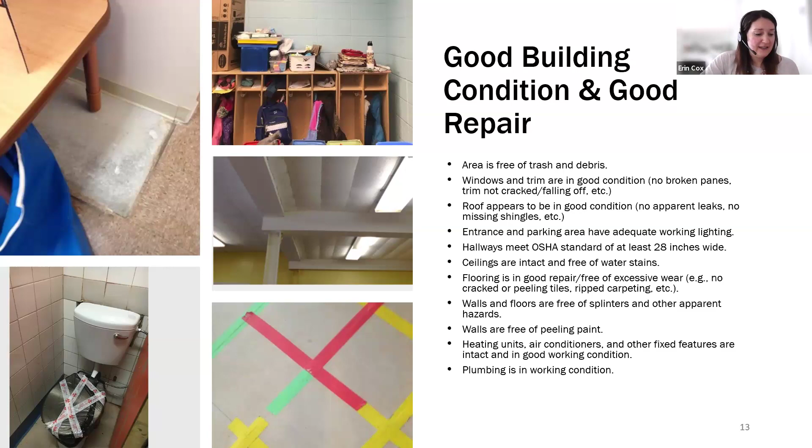In addition to building condition and good repair, regulations generally reference facility health and safety. Common things referenced are that there aren't any sharp objects or major tripping areas, or obvious child hazards that can impact a kid's ability to move freely through a space, that emergency exits and pathways are clearly identified, spaces are uncluttered and easily supervised, heating units are concealed and securely covered, and operable windows have secure screens. This can be a lot to manage between making sure the facility is in good condition and meets health and safety requirements.

But maintenance planning is really, really important. So with that, we'll talk more about maintenance planning and how you can prevent issues or make sure you're meeting some of these requirements. So I'll kick it back to you, Megan.

Maintenance planning, we are definitely all about planning. So just getting on the same page as others at your program, or if you lease a space, your landlord, if you're sharing a space, you might have other tenants you want to coordinate with. This type of plan can help create buy-in and clarify to everyone involved how to communicate when maintenance needs arise, and when they do, what action to take to make sure they don't snowball into greater issues.

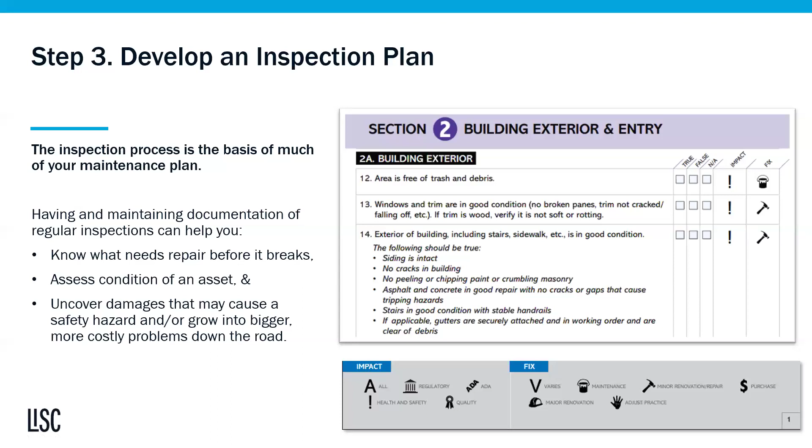If you are selecting false for any of these, this particular checklist also provides some guidance, as you can see in the icons at the bottom here. With these in the impact column, you'll see those are all health and safety related. The first item is a maintenance item, so you'll be able to pick up that trash and debris. Then the other items are minor renovation and repair that you want to take care of before they become anything major.

You may need to offer some training if you have staff who will be helping you implement the plan. Just make sure that everyone is clear on what their roles are and what to do should a maintenance issue be found.

If you're currently in a leased space, again, be sure to understand what your role is in maintaining the space, and make sure your landlord understands there are some additional maintenance needs for a childcare operation that might differ from other tenants. You want to make sure they're aware that you need to meet some of those health and safety requirements of licensing that connect back to having your space in good condition and good repair.

And lastly is budgeting. Use this plan to save and set aside funding in your annual budget for required upkeep and repairs. This should include your playgrounds, any above standard cleaning services, landscaping, regular cleaning, HVAC system servicing, all of those ongoing costs.

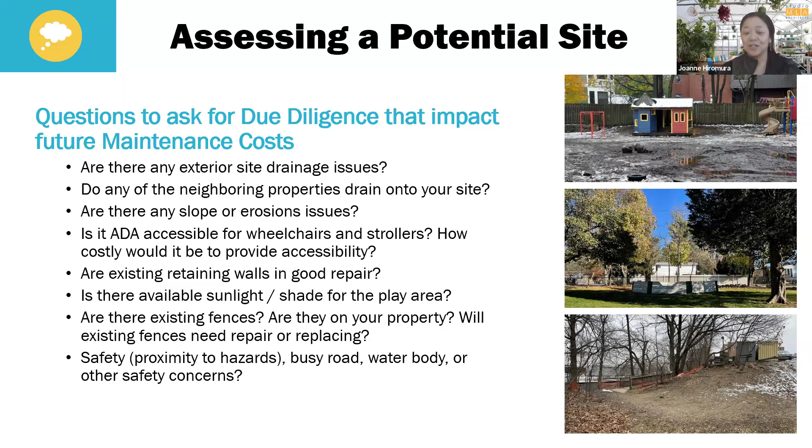Okay, next — picking colors for your walls and flooring, and dreaming and imagining the perfect layout for classrooms, corridors, staff spaces, and entry. There's so much fun you can have making your dream into a reality, or taking your reality and making it into a dream, depending on how you look at it.

But things like designing a vestibule or mudroom might seem like a waste of space in a tight center. However, having that vestibule helps with your HVAC efficiency over the life of the center. And if you put in a durable walk-off mat in that vestibule or mudroom, it helps keep the snow, rain, dirt, and sand from tracking into the rest of the center, which can extend the life and cleanliness of the floors.

Width of hallways — strollers, buggies, kinder vans, food carts, meandering children — all of these are going to be meeting in your corridors. Usually the adult pushing the stroller or cart will make way for the children in a tight corridor, and as soon as they do, that often results in wall damage. So when planning your center, make sure corridors are wide enough for at least two strollers to pass each other — it saves on wall damage in the long run.

Next, when we design for durability, there's some things to think about to increase the timeline of materials and decrease our maintenance expenditures. One thing to think about is countertops and cabinetry.

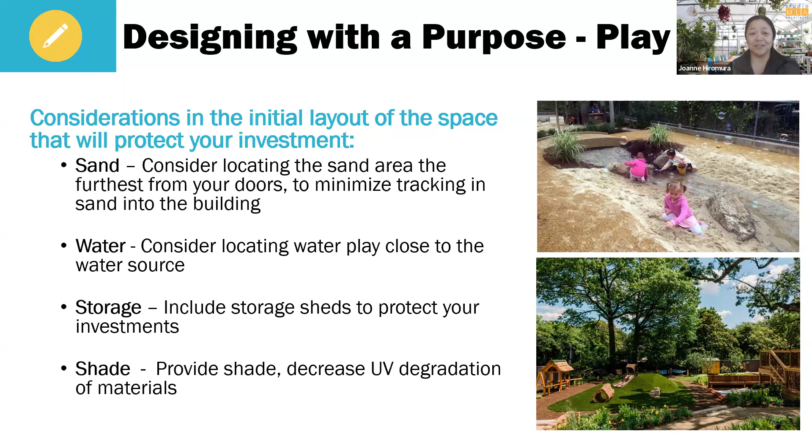When thinking about the design of your play space and what you're going to have in it, you really need to assess your maintenance capabilities realistically. Having gardening space is a wonderful activity, but you need to consider whether you have staff willing to maintain it, water the garden, weed the garden. Otherwise it will just be a maintenance headache.

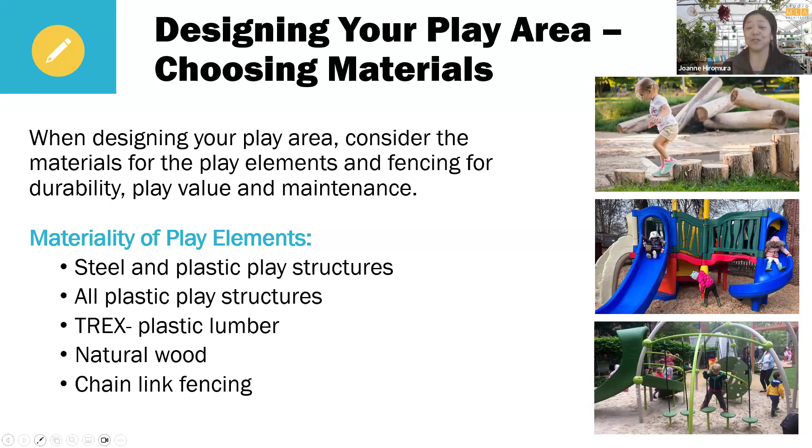Next, we're going to talk about choosing materials for your surfacing. When you're thinking about surfacing and you have play equipment that has a fall height, you'll need to install playground safety surfacing within the use zone of the piece of play equipment, and the manufacturer will let you know where that use zone is. Very, very generally, it's about 6 feet out from the outer perimeter of any play climber.

There are different types of safety surfacing. One option is called unitary playground safety surfacing - unitary meaning it's bound together, not loose. Some types of this unitary surfacing include poured-in-place rubber safety surfacing, which comes in many colors; bonded rubber mulch material, made out of shredded rubber bound together with an adhesive; artificial turf, which is like a carpet that's rolled out; and a newer product called Corkeen, made out of natural cork, also bound together with an adhesive.

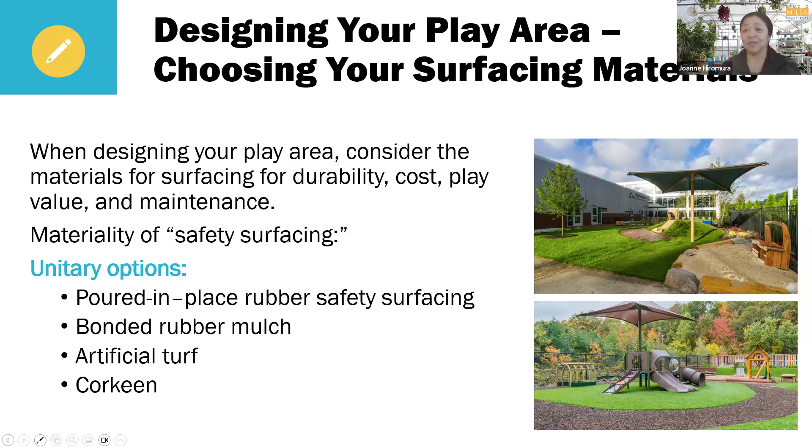These options are a lot less expensive than the unitary surfaces that we saw, but they do require replenishment and periodic maintenance. Because they're loose, they're going to be kicked around—that happens at the bottom of the slide or the base of the swings. They get displaced, and they will migrate out of the area you're trying to contain them in. And because the wood specifically is a natural product, it degrades, and you will most likely have to replenish it, if not fully replace it, at least every year.

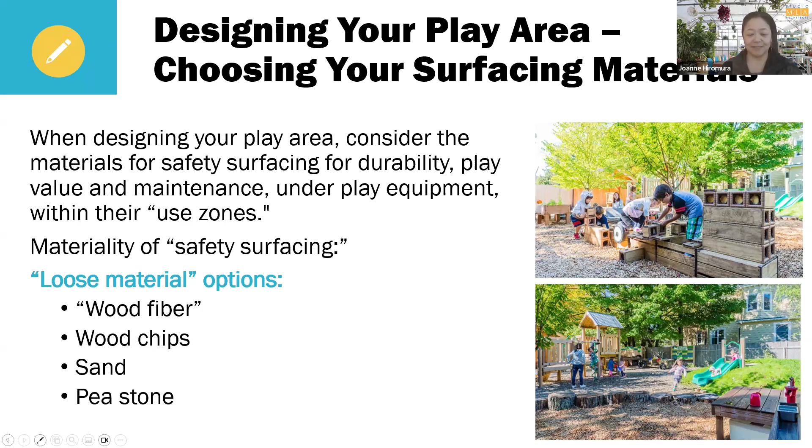But you can mix them as well. So you could have an area with wood fiber and/or wood chips or sand, and provide an accessible path to your play equipment made out of something like rubber, which is accessible.

Okay, so then in areas that aren't required to have playground safety surfacing, you'll have other choices in surfacing or pavement materials. Other surfacing could be natural lawn, stabilized stone dust, concrete, or asphalt for paths or play courts.

Natural lawn is probably your least expensive, but your highest maintenance option. Lawn is very, very high maintenance. In order to keep a nice natural lawn, you probably know just from your home experience, you need to water it, weed it, cut it, mow it, and you can't have a lot of heavy usage on it, especially in the play area.

So there is a type of plant material called no-mow lawn, which looks more like sort of natural grasses. It doesn't need to be cut—it just sort of keeps growing, and it's very tufty. You can look into that. It doesn't need the mowing, but it still would require watering.

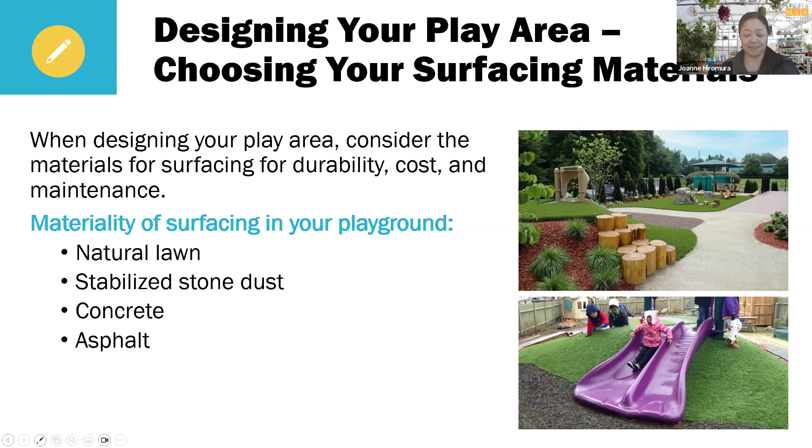Maintenance, it's a given. You absolutely must plan for it, and you've got a budget for it. It's ideal to have a short-term maintenance plan and preventative maintenance plans in place, with daily and weekly cleaning specifications. There should also be annual maintenance plans—checking and testing all smoke detectors monthly or seasonally, replacing fire extinguishers and checking their expiration dates. I'm not going to go through the whole list, but these are some of the things you want to check on an annual basis.

There should also be long-term maintenance plans. These are things on a 2 to 3 to 5 to 20 year replacement cycle, but you need to be setting aside a little bit of money each year, knowing that in 5 to 10 to 15 years these things are going to need to be done.

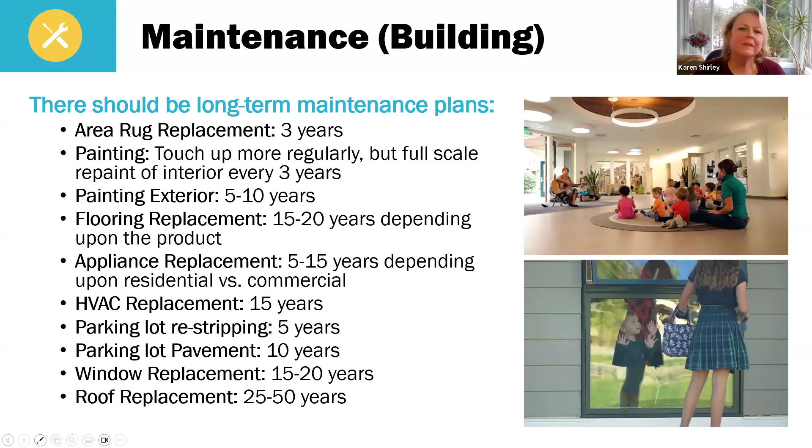There's always going to be surprises—overflowing toilets, heat units going out, storm damage, things you just have no control over. But having a plan in place and a team to support you is crucial to success.

Before you need a local plumber, get some recommendations from your neighborhood, friends, and relatives about quality local plumbers. Maybe even consider inviting one of those plumbers into your preschool room to talk about what they do and what they like about their job. Then have the children send cute little thank you notes with pictures showing that plumber respect and appreciation for their work as a community helper. Developing that relationship in advance means that when an inevitable plumbing problem happens, that plumber is probably going to be more willing to drop everything and come help take care of you, your center, and those children.

Have professionals show you your water turnoffs. Sometimes there are local water turnoffs in your toilet rooms, but there's also, if there's a massive problem, a turnoff somewhere else in your basement or elsewhere in the building. Knowing where those are can be crucial in an emergency.

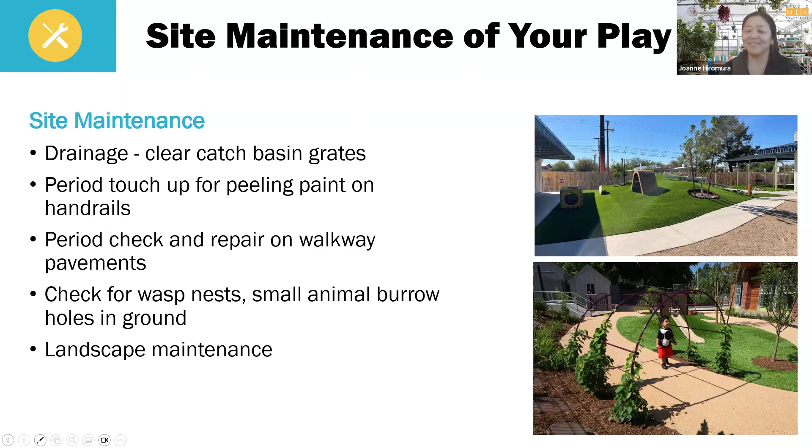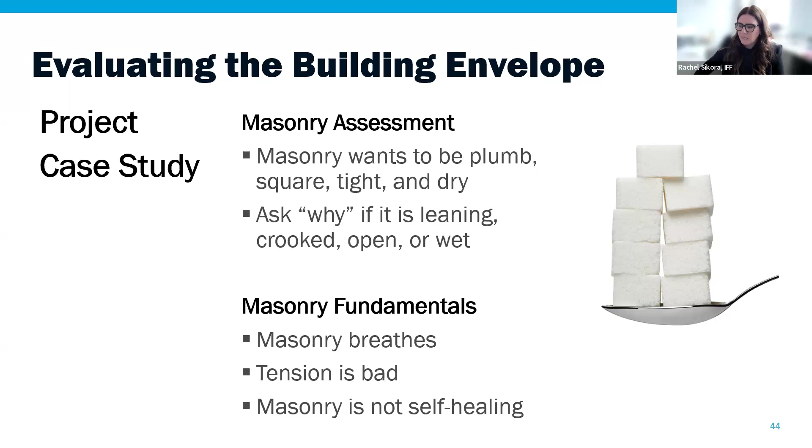Instead, we need to set the conditions that keep masonry square, tight, and dry, and then keep our eyes open when those considerations are no longer the case. The biggest challenge with water is that its impact on masonry — and roofs too, because we're going to look at roofs — is usually worse than what you can see. By the time you see the damage, there is water in that location, and that water is likely seeping elsewhere as well. Megan, if you can go to the next slide.

We'll pick up a little bit of time here, maybe go a little faster. First and foremost, setting the conditions for keeping water away from your masonry starts with the structures that are designed just to do that, and you will see variations of these same structures whether you have a home or a commercial center. These are your parapets, your gutters, your downspouts, your roof drains, and these structures must be present and intact in order to direct water off of your roof and away from your building.

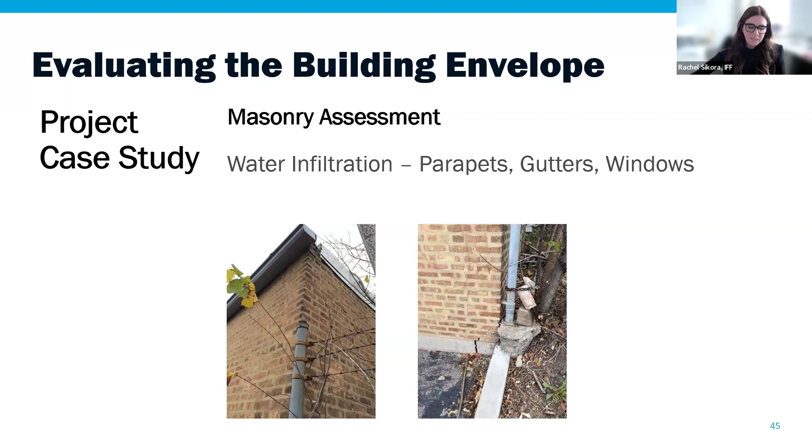Another consideration that isn't pictured here is the condition of the ground at your foundations, at the base of your walls, to continue directing water away from your building — pitching the ground away from your walls where water could otherwise collect and cause damage to the exterior walls or the interior space. Next slide, please.

The structures that direct water away from your building are so important because often you don't know that water infiltration is causing damage to your building envelope until you start to see the evidence of it, which could be a long time in the making before that evidence is visible.

As a result of water getting behind your masonry walls, you'll start to see conditions like cracking and spalling of the masonry. These are safety hazards. When units detach from the walls, they can create environmental hazards as water gets behind the walls, creating mold development, and can also cause water infiltration from the exterior wall to your interiors.

Most of us have experienced what it means to have water inside your home or your center, and the chaos and havoc that creates, damaging finishes, furniture, and costing time where you can't use your classrooms because they need to be repaired.

Other features of your envelope that keep water from entering your interior, not pictured here, include your windowsills, intact windowsills, flashing around your window openings, metal that prevents water from getting into the opening between your window unit and the wall above or around it, and the seals around these openings.

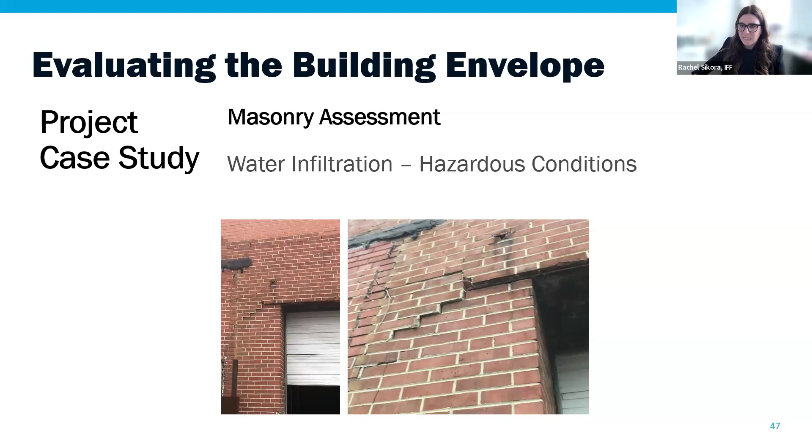This photo is an example of a steel lintel, looking a little closer at one that has become excessively rusty due to exposure to water that has not been directed appropriately from the building, but has come down the walls instead. This is an important condition to look out for because a lintel carries the load of a masonry wall over an opening, and a rusty lintel is a compromised lintel, which also indicates a compromised structure.

As we think about these conditions and the impact of water and the implications for your building, we think back to those structures and interventions, the preventative maintenance of which can help you get ahead of any impacts of water before it causes significant damage.

Water always finds its lowest point. That's the thing about water, it will always find its lowest point and damage anything below it. So starting at the roof helps mitigate any damage to the walls below, and mitigates the replacement and reconstruction of any areas that could be impacted.

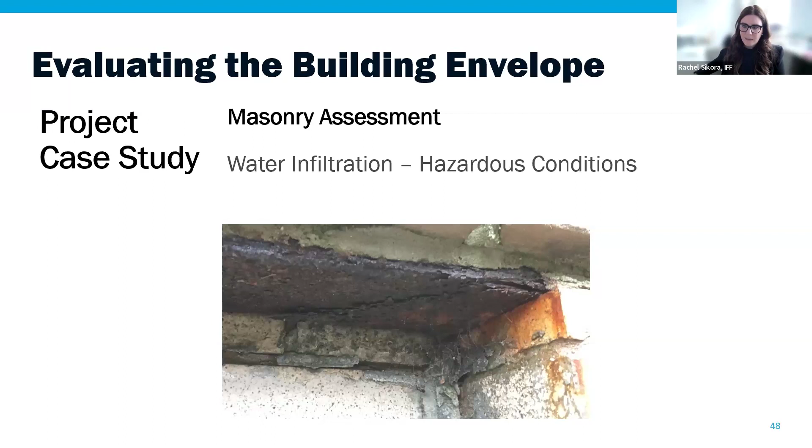Your roof is one of the most important factors in keeping your building warm, safe, and dry. As someone who routinely has to get on roofs and is terrified every time I step on a ladder, I understand roofs are somewhere most of us don't like to go. But some of the most likely opportunities for water infiltration into your building are on roofs, expressed in membrane penetrations, ponding of water, discoloration or texture in your membrane showing signs of previous ponding even if water isn't there currently, and missing flashings or wraps on the curbs for your mechanical equipment or parapet walls. Fortunately, with regular inspection and vigilance, these conditions and any resulting damage can be mitigated.

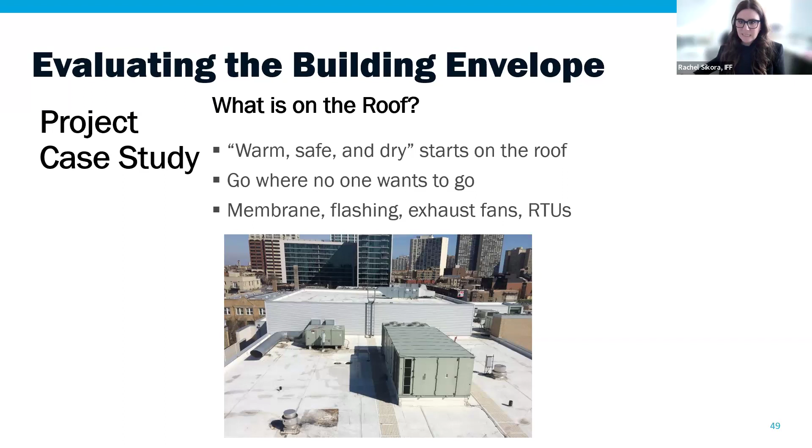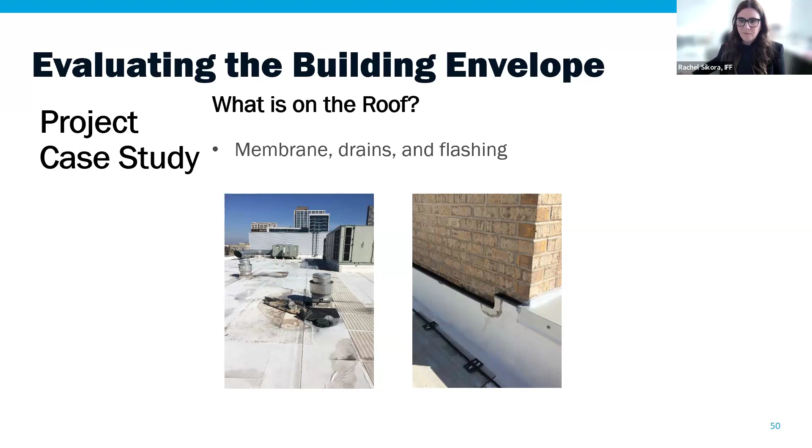Additionally, on the top of your building, apart from the roof itself, is the mechanical equipment that supports the heating, venting and cooling of the interior of your space. These are really big pieces of equipment. You want to maintain them for operational efficiency of your mechanical system, but also for the comfort of everyone inside. You'll want to maintain the curbs and the penetrations that support them, ensuring proper ventilation of the units and also preventing water from entering your building.

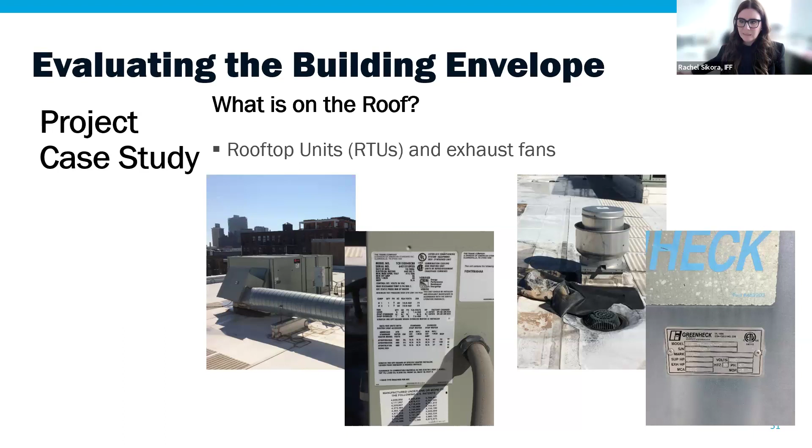Similar to your walls, by the time you see evidence of water on the roof, it's likely already creating chaos in some way. If you're purchasing or leasing a facility where these conditions are already present, these are conditions you'll want to investigate and mitigate immediately so you're limiting the impact to your center of water getting into the building—or, if you're leasing, negotiating repairs by the landlord to protect the interior space.

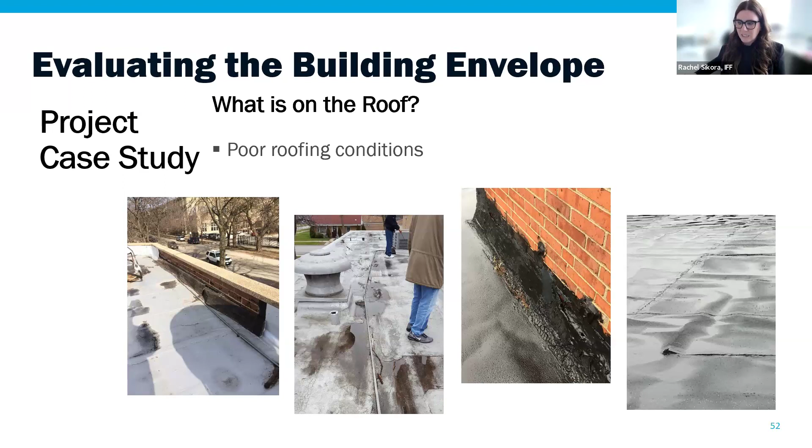So Megan, hand it over to you.

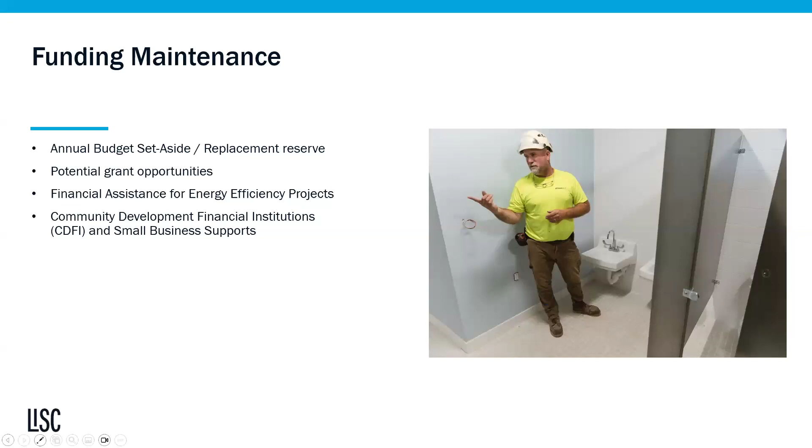And lastly, many CDFIs like LISC and IFF have expertise in lending to childcare programs. These lenders may be able to offer flexible products and support to walk you through what can sometimes be a complicated process, which we'll talk about more when we get into small business supports. But first, I'm going to turn it back over to Rachel to share other considerations around funding maintenance.

Megan, that was a great segue into this section, because IFF works routinely with ECE providers in thinking through how you can bring funding opportunities into a project, and how you deploy those funds effectively for your building improvement strategies.

Thinking about this over the next few minutes, many of us have probably encountered circumstances where we've completed our own assessments of our facilities, gotten ahead of maintenance that could be challenging down the line, or made other improvements to space to support our programs.

Similarly, many of us have probably encountered circumstances where, once we've identified our maintenance, repair, or replacement needs, we've been limited in funding available to address those needs. So what should your considerations be for prioritizing where your dollars will go to have their greatest impact?

When working with our clients at IFF, we look at a very dynamic context that every opportunity for investment in your building exists within. That context is created by you, your staff, the children in your classrooms, their caregivers, and your funders. So what factors form this context, and what is their potential relationship to revenue?

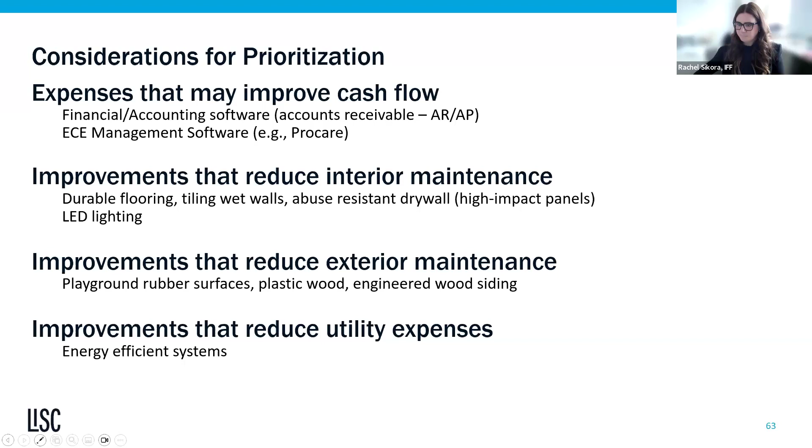So I'll probably go to the next slide. And just looking here, we're not going to spend time - we want to give LISC a couple of minutes to finish up here. But these are the considerations that have a more indirect impact on facilities rather than a direct impact on facilities, but they're still highly impactful all the same.

And we know that this can always feel very overwhelming and it can be difficult to prioritize. But some or all of these considerations may be relevant to you along with others that aren't listed here. And this list is not intended to overwhelm. It might, but really to encourage you to keep in mind that addressing issues of deferred maintenance in your building, even though that can feel mundane, can have a really leveraged impact if you consider strategy and sequencing of these improvements and the impact that they can have on your center beyond the improvements themselves.

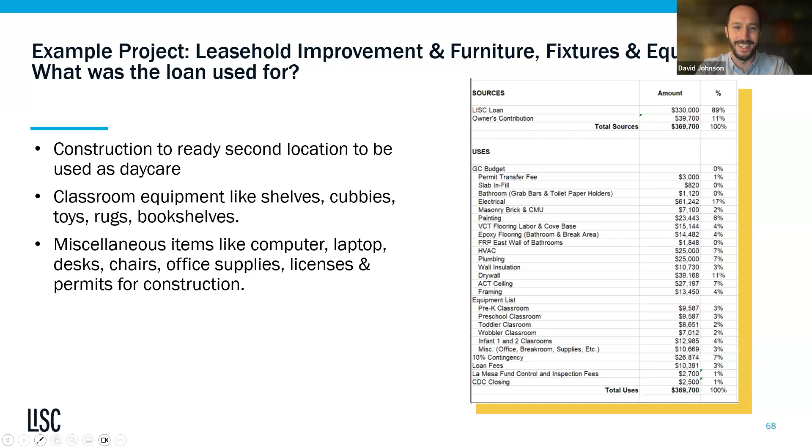If we can go to the next slide, we'll talk about that too. So renovations - this example actually was for an expansion. It was somebody that Aaron and team had given great technical assistance to over the course of a few years, and had really mapped out the expansion strategy to go to a second location. On the lending and funding side, we again made sure that expansion was something manageable from a cash flow perspective. That involved looking at the historical operations of the first facility and working with the child care center on projections for that second facility.

The other scenario that would come up the most is just renovations to your existing facility. That could be a variety of different things - maybe you're not currently able to be at capacity because you have to make some of these renovations, or maybe you are, but you just need to make them for any of the reasons we've listed today, if something comes up, or just ongoing maintenance of the facility. So even more reason in those cases too, for your cash flow, for your operations from the current facility, we want to get a really strong understanding of how that works, your operational cycle, and when you're getting paid, to make sure the structure of the loan is manageable. I think that's the biggest takeaway - making sure that the cost of renovations and the repayment you're making on those fits in your cash flow.

So we really do look forward. A lot of these things are just very one-on-one conversations that we would love to have as a follow-up after the presentation today.